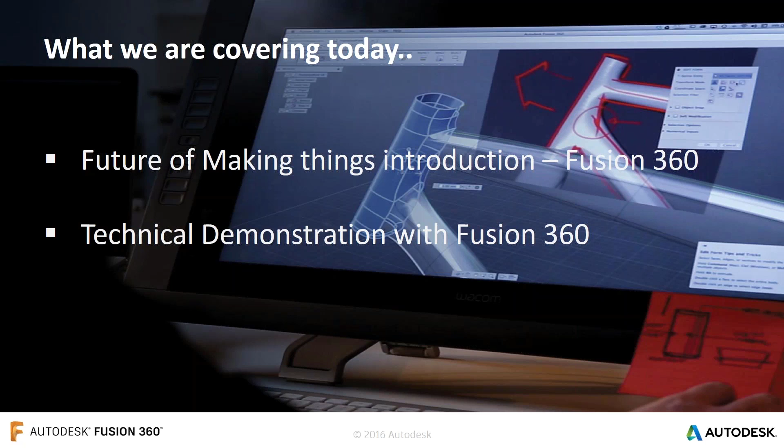So just a quick overview of what we term the future of making things. Now, we've visited a lot of our customers, and a lot of them work in a very similar way to each other. They start off product development with a concept phase. These can be, pardon the expression, fag packet sketches. They could be very quick concepts, maybe some rudimentary 3D models. They then move this into a more production level design, adding all the dimensional constraints to the product itself, creating all the drawings, PDFs, bills of materials.

And then move this into production. This could be a mixture of what we term subtractive manufacture, so CNC manufacturing of components, or even assemblies and bits and pieces. We then move this into selling that product, and finally operating and retiring that product. Now, we can quickly see that it's a very linear process. It's very structured in nature and very siloed. We term this a traditional product lifecycle. And it has what we term a fixed product value, because around the selling, operation, and retire phase, we're having to rethink the concept, design, production phase for the next generation of product.

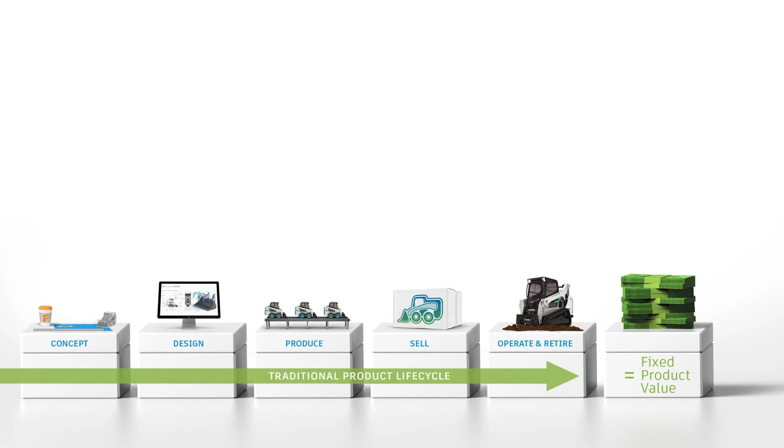Now here at Autodesk, we look at this a little bit differently. During that concept phase, we have a broader reach. We can customize the product a little easier to what that customer would like, whether that's color changes or small changes to suit that customer. We can then use virtual teams. They don't have to be in the same geographic location. They could be dispersed around the globe, but we can quickly start to collaborate with them, bringing in ideas from manufacturing, production and sales to develop the next generation of product.

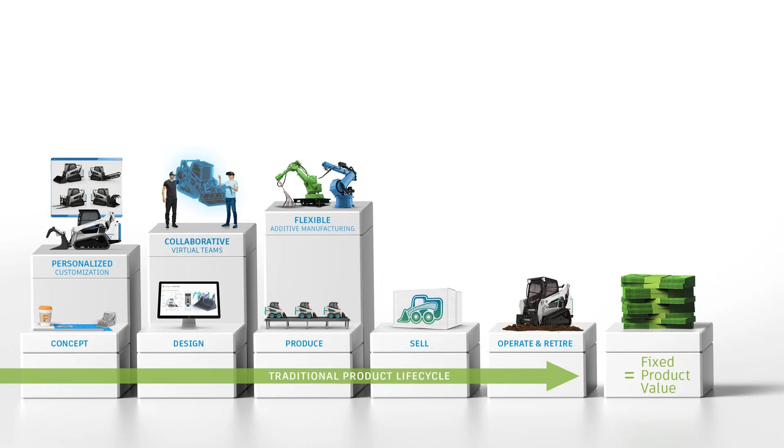We can handle flexible manufacture, so not tying ourselves down to subtractive manufacture, but also taking into account all the 3D printing enhancements that have been happening recently, such as the ability to metal or additive 3D print something and run some final machining toolpaths on it. Moving into the sales phase, the customer's more engaged and the product's more personalized because we've customized it at the start. And finally, we can connect that product to IoT and Industry 4.0, look at how it's being used in the field, inform the next generation of product, or even start to look at preventative maintenance.

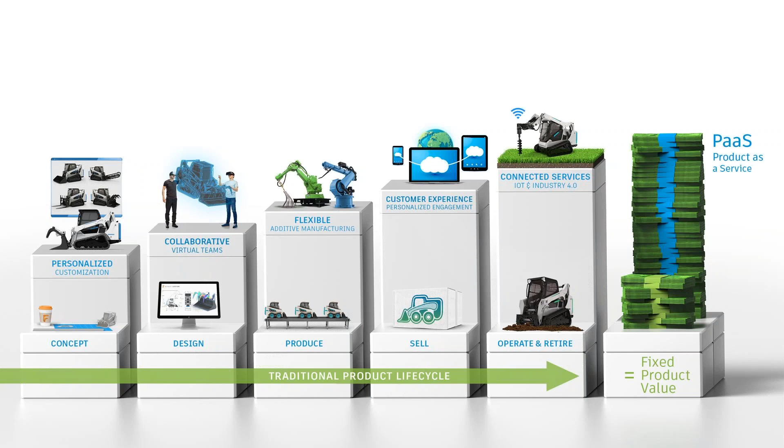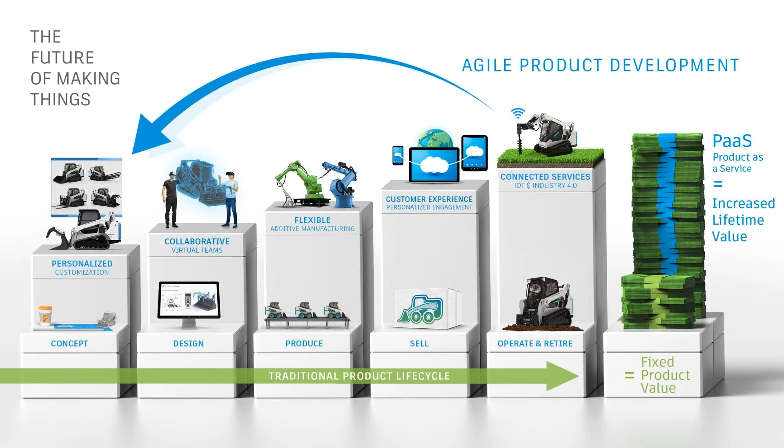So this gives us what we term product as a service. We're not just selling our products anymore, we're also selling the services that go with it, such as preventative maintenance and data capture. And it gives us what we term an increased lifetime value, because all of the data that we capture from that product in the field, we can plug back into our design at an earlier stage in the process, giving us the future of making things. Now all of this sits on what we term the product innovation platform. We can start to work with those design silos.

So starting to look at concept design, we can then go ahead and move this into production, start to look at PCB design, how we can then push that into mechanical CAD instead of leaving that within ECAD. Having the ability to virtually test something, moving this into the make space and actually create that product. And then finally, the use phase and connecting that product up to IoT and Industry 4.0 to quickly and easily go ahead and start to inform that design decision a little bit sooner.

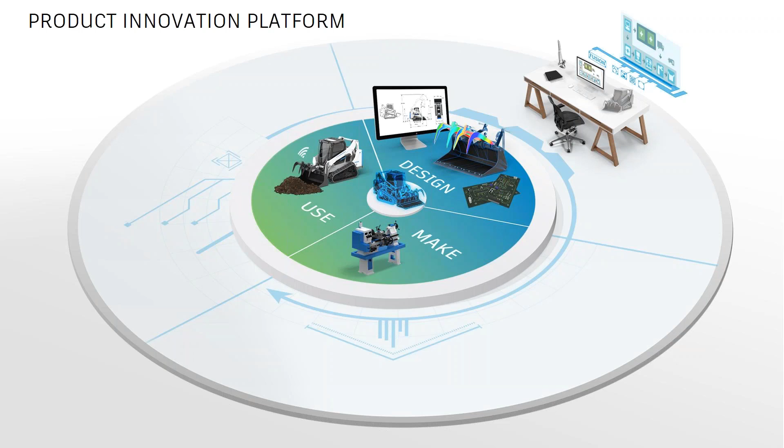From here, what we can then go ahead and do is start to build on that. So bringing in those collaborative teams during the design process to quickly and easily get a broader reach, so we can go ahead and have a detailed manufacturing process further down. We can again bridge that gap, like I said earlier on, with additive and subtractive, having the ability to quickly and easily use that bridge between 3D printing as well as our standard techniques such as subtractive manufacture.

And looking at IoT, not just analyzing the product while it's out in field, but also analyzing how the product's being manufactured while it's still with us, and starting to look at machine utilization and how we can then go ahead and make sure that we're getting the kind of throughput that we need from our production floor. So giving us a really detailed platform of products that we can go ahead and start to look at generating this next generation of product.

And this is what we term an integrated product development platform. So a single platform to take our design from concept through to production. What I like to term art to part. And you'll hear me use that often within the webinar itself. So we start off with form, so we can quickly and easily start to generate those concept models, move this into function, start to create those production level designs that we need, 2D drawings, check for fit, form and function. Move this into fabrication, so obviously manufacturing the product, and finally managing that and making sure that all the versions and bits and pieces are captured as we go.

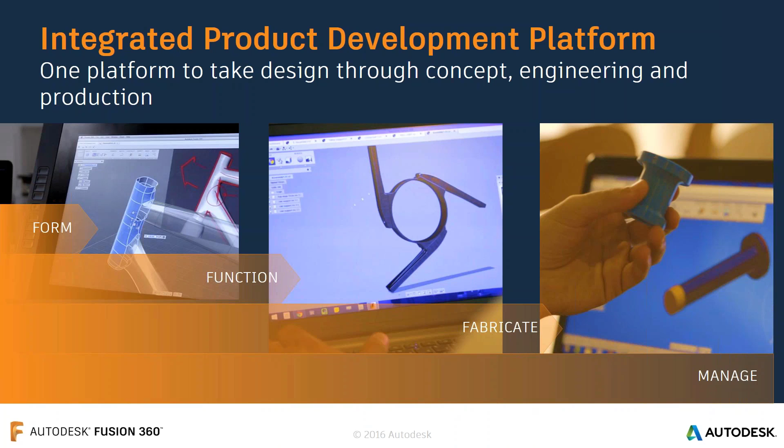Now, just a bit of background on why we built Fusion. We went out to our customer base in the actual market and said, okay, what do engineers and designers want from that next generation or next level of CAD tool that they're going to be using? One of the key things that we found was that they wanted access anywhere. Now, traditional CAD ties you down to a specific set of hardware, and you're tied to that machine, maybe in your office or even a laptop.

Now, instead of that, Fusion 360 works on Mac as well. So you don't actually have a device or a set of hardware specs that you really need to tie yourself down to. So from here, we can run Fusion 360 on a Mac as well as a mobile device, and we have the ability to work anywhere and at any time. Fusion is what we term hybrid cloud, so we can quickly and easily go ahead and access our data wherever we are within the world, and we don't actually need our laptop with us to do that. We can quickly and easily start to view how that data is moving on within our design teams.

They also wanted us to have a bit more of a connection with different teams. Now, generally what we saw is our design teams are kind of siloed, and then when we move it into manufacture, some design changes need to happen, and it's generally either a set of notes, a piece of paper, or someone tapping on a designer's shoulder to say, look, these changes need to happen because of manufacture.

So that's the reason, two of the key reasons why we built Fusion 360. It gives us an integrated platform, which we'll be showing you in a second. It gives us the ability to connect a whole host of virtual teams within Fusion or within the business, and also gives us accessibility anywhere we are in the world. So it gives us that complete 3D CAD that we need, when we need it, on demand.

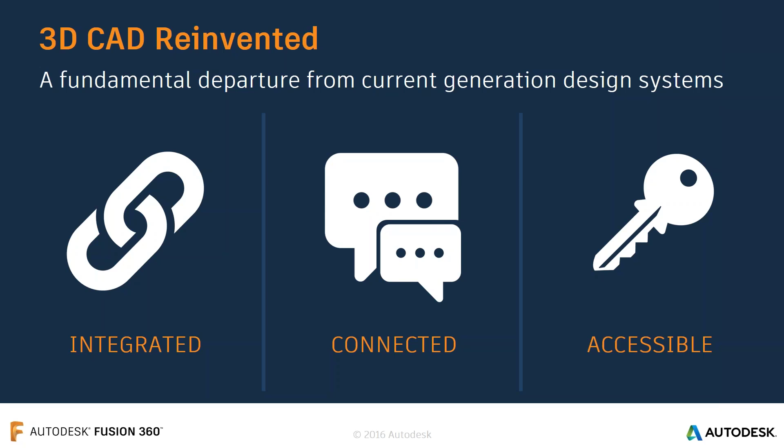So let's jump into the technical demonstration of Fusion. Now we're going to concentrate this technical demonstration on the new functionality, which is sheet metal, which was released on August 8th this year. And we're going to go ahead and focus in on some key areas.

Now we're going to look at this router table, and specifically we're going to look at the actual router head, and we're going to create the sheet metal components for this segment itself. So these areas just here, the cap at the top, this front sheet metal component, and this one at the bottom as well. We're going to look at how we can use this within Fusion itself.

So we're going to initially look at the sheet metal functionality, how we develop a sheet metal component within Fusion, some of the sheet metal tools within Fusion. We'll look at some of the rules, how we can override those, creating flanges and bits and pieces. We'll then move this into what I mentioned before, which is our communication layer, how we can communicate this design out to other people within the organization.

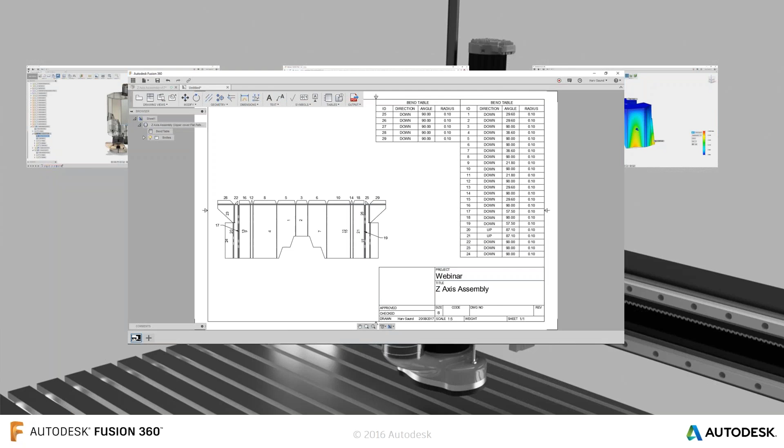We'll then look at how we can take that design and use some of the simulation tools within Fusion to quickly and easily test the design and make sure it is fit for purpose before we manufacture. We'll go ahead and start to look at the flat pattern and the actual drawing, and creating the bend table within Fusion as well, so again a real quick and easy way of doing that.

We'll move this into the render space. Again, we want to create a nice visual for our customer, and we'll go ahead and do that. And then finally, we're going to finish up with the CAM, so we're going to look at how we can manufacture that product. In effect, what we're going to do is take a design from art to part, so it gives us that complete area that we can then loop through.

And again, I'll be going back and forth and switching between Fusion just here.

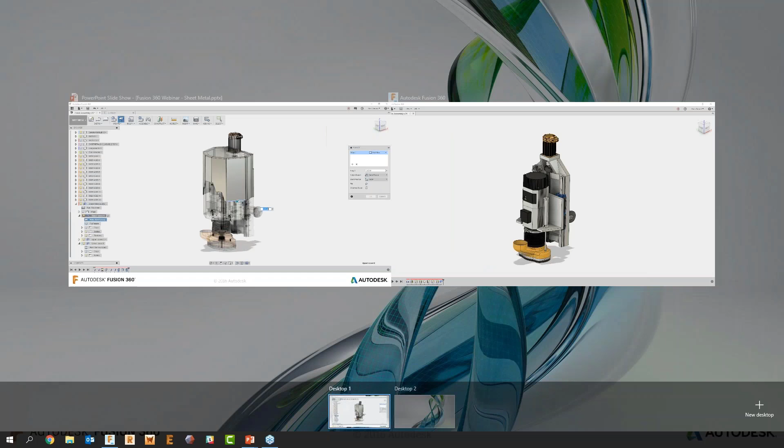So let's jump into Fusion and let's go ahead and take a look. So here's my example, or here's the router head that we're going to use, and we're going to create all the enclosures and bits and pieces for this design. Now, at the moment I'm in my modeling workspace, as you can see in the top left-hand corner of the screen. And if we want to jump into sheet metal, it's simply a workspace switch.

So we can quickly jump into the sheet metal environment, and we now have sheet metal specific tools. We start off with our sketches on the left. We then have the option to create new components and flanges. We have the ability to look at sheet metal rules. And if I expand each of these, you'll see specific sheet metal tools as well, such as unfold, and also the option to create a flat pattern as well.

So I'm going to go ahead and start off. I've already created a quick sub-assembly for our sheet metal covers just here.

Now, there's a reason why I've done this, and I'll show you later on as to why we've gone ahead and done this approach itself. But first thing I'm going to go ahead and do is create a sheet metal component.

You don't have to do this, you can just start off with a sketch. But I like to organize my browser on the left-hand side of the screen, so that's one of the reasons why I'm going to go ahead and do this. So I'm going to call this upper cover.

And at this stage, I can start to specify the sheet metal rules that I want to use. Now, we have a standard library of rules that we can go ahead and work with, or we can have a couple of customized rules as well. Each of these will start to look at specifying your thicknesses, K factors, bend allowances, conditions for the bend, relief statuses and bits and pieces. So I can set these just here, for this design.

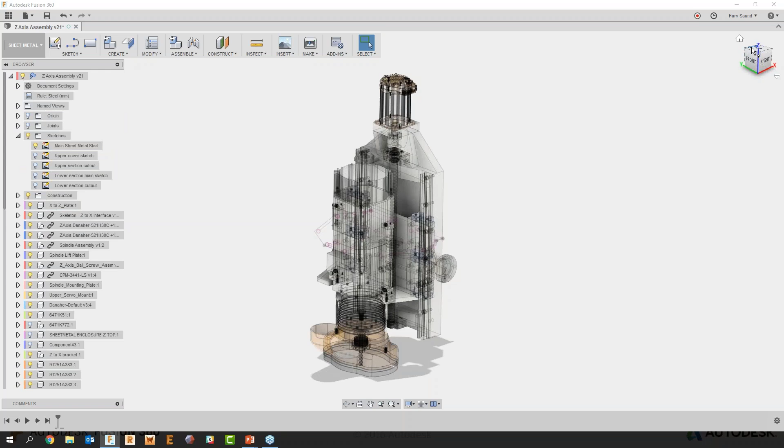So for this design, I'm going to go ahead and start off with a sketch. I've already created a few sketches that I'm going to use, and I'm going to snap to a top view so you can see the sketch that I've created. This is the sketch I've created just here, and it's just a couple of offsets from a couple of edges from the design so that we can capture the absolute outside limits of that design. Using this sketch, we're going to quickly create that first sheet metal component.

And we have a single flange tool to do that. Our flange tool will go ahead and start to look at creating base flanges, contour flanges, open flanges, edge flanges, so on and so forth.

So if I pick up on our flange tool and specify a contour or a sketch edge, you'll notice that it's open, so you don't actually need to have a closed contour to create the first flange itself. You can quickly and easily, very visually, start to grab and drag and create the flange that you want to use.

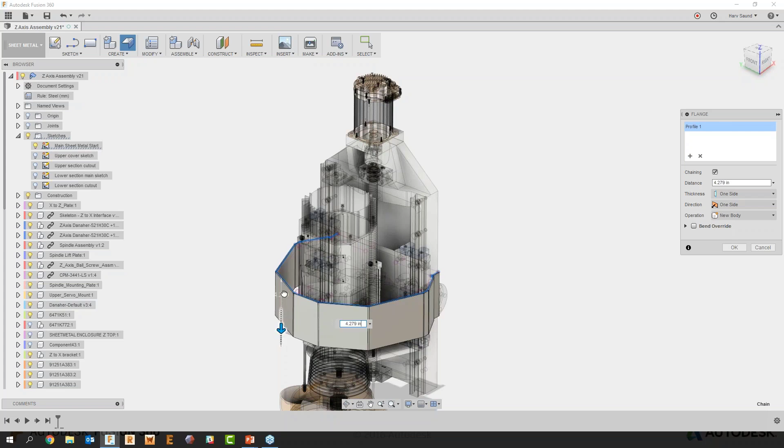Now I want to snap to a specific height because this flange is going to finish at this face just here. As soon as I hover over it, it will give me a size that I'm going to snap to. So I'll snap to that, and I can also set a value for this. I'm going to call this -12.5. From there, I've hit enter, and we can start to see that flange being created.

I can come back here, edit the feature, and we can start to specify some extra options. You can also do this when you go ahead and create the flange. I was just a little bit too quick with my enter key, so I pressed enter the first time round. So let's go ahead and start to set a couple of options for this.

Now at the moment, the sketch itself is sitting on the inside, and our flange is sitting on the outside. Now I actually want the flange to sit on the inside of that sketch. So over on the right hand side of the screen, I can specify my thickness direction - whether this is on one side, whether this flips to the other side, or whether this is symmetric, so the sketch sits in the center of the actual flange itself. That's totally up to you how you want to do that. I'm going to go for the other side so it sits flush with the actual component itself.

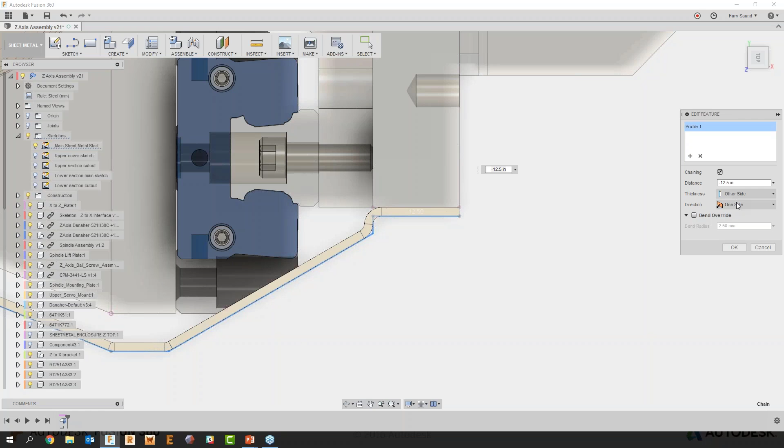And then at this stage in our dialog box, we have the option to go ahead and override the bend radiuses as well. And again, we have the option for extrusions and bits and pieces. So it gives us the ability to very quickly and easily specify that first flange that's being created within Fusion.

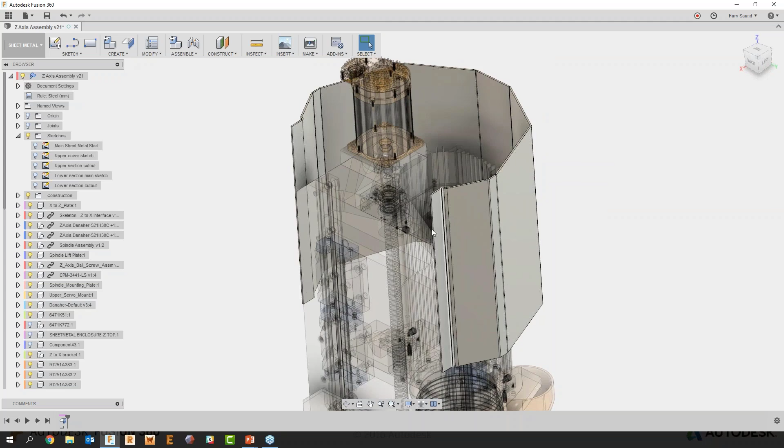So we've already started to create that sheet metal component. Now, one of the key things I want to do is take this component and make it a little bit more complex than it actually is. From here, I want to grab a flange on this edge and bring it in. As you can see, we've got a slope on this side at the back just here, so I want to match that slope and create a flange just in this top section. So I'm going to go back into that flange tool.

If I right click, I have my flange tool on my gestures menu. From there, I can pick up a couple of edges just here and here, and with that, I can just grab the arrow and drag. Now I like to do things visually, and as you can see with Fusion, you can do it very visually.

So very quickly and easily, you can start to create those flanges. Now they're going the wrong way, I want to flip them. I have two options: on the right hand side of the screen, I have the flip option, so I can flip that the other way, or I have the rotation ring that I can use. This is very useful, and I use this more than the flip option, because I can actually visually see if I want an angle on that design. Very quickly and easily, it gives us a very easy and visual way of utilizing that. A great tool just there for Fusion.

Now again, I can start to specify the overall distances that I want. I want this flange to be 4 inches, and from here I can start to specify our bend positions, whether it's inside or outside. We can also specify a height datum, so where we're measuring that flange from. At the moment it's set from outer faces, so it's going to measure it from this face to the edge. If I wanted it inner faces, it will measure from the inside edge to the outside edge itself. So it gives us the ability to quickly and easily limit and change those as we need to.

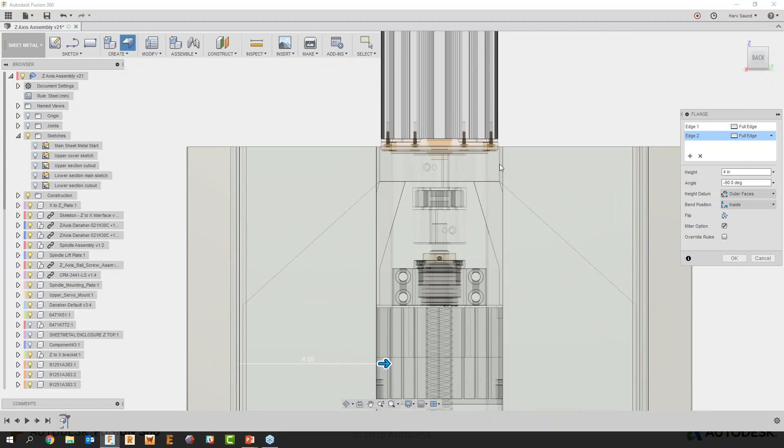So if I snap to a back view just here, as you can see, the flange finishes just short of that top pillar just there, but it is actually a full length flange. Now in traditional CAD, to change that flange, we'd start to look at maybe adjusting sketches, or even coming back in here and creating smaller cutouts, and maybe actually the flat pattern may start to fail. We'd have to create potential relief cuts in certain areas.

With Fusion, we've kind of changed the game with this. On the right hand side of the screen within our dialog box, every flange is considered its own, so we can adjust the overall parameters for the flange, the size of the flange individually from each other. For edge 2, which is the one I've got selected just there, I can go ahead and say that's either going to be a full edge, or I can make that symmetric. If I grab one of those arrows just there, you'll notice I can extend past the extent of the flange, and the relief options appear as they should, or I can come back in, and again those relief options appear as they should.

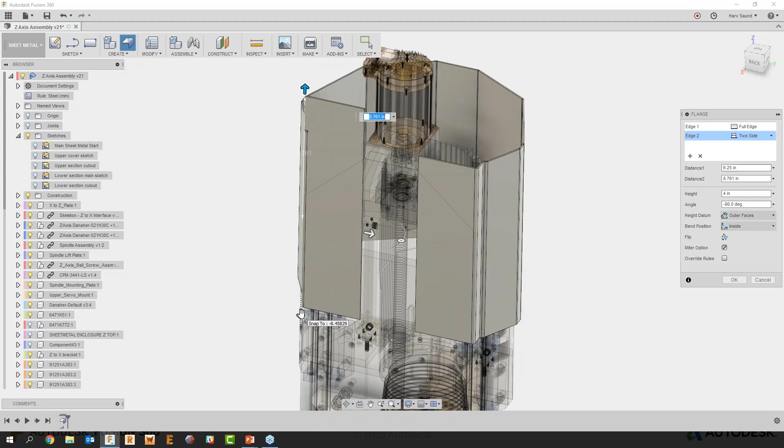So very quickly we can have that symmetric flange either side from the center. If I wanted that to be maybe two-sided, so an offset, one side's longer than the other, or even if we wanted an offset where one side overlaps the edge of the flange and the other side is centered or inside that, we can do that very simply within Fusion. Again, I'm using the arrows on screen, but you do have dimensional control as well. Or we can go all the way and say that flange is going to be slightly longer. We also have the option for 2 offsets, so you can specify a reference edge or point that you want to use, and you can specify where that flange is going to be within that point.

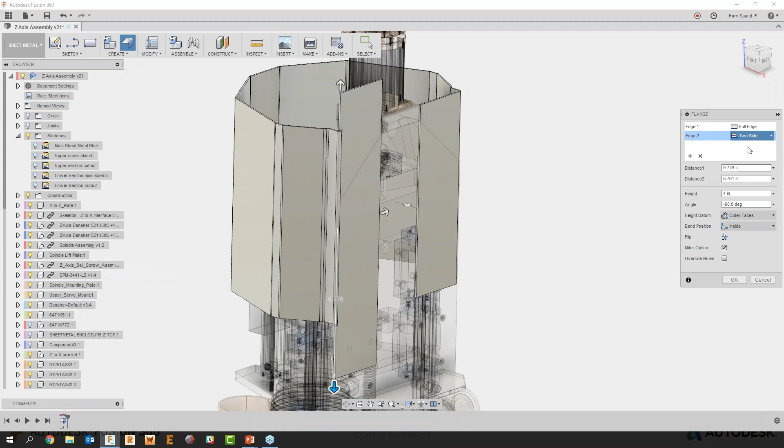So I'm going to go back to a full edge just here, and maybe what I want to do is use two sides. I can actually bring this side down because that's going to be flat to there.

And what I want to do is just bring this side back up again. So for that, I'm going to go ahead and make that -2 inches from the center. And that's then going to go ahead and create me a flange that is slightly off from the edge or the end of that slope, and also put the correct relief cut that I need in. When we go to flat, it will be correct for that.

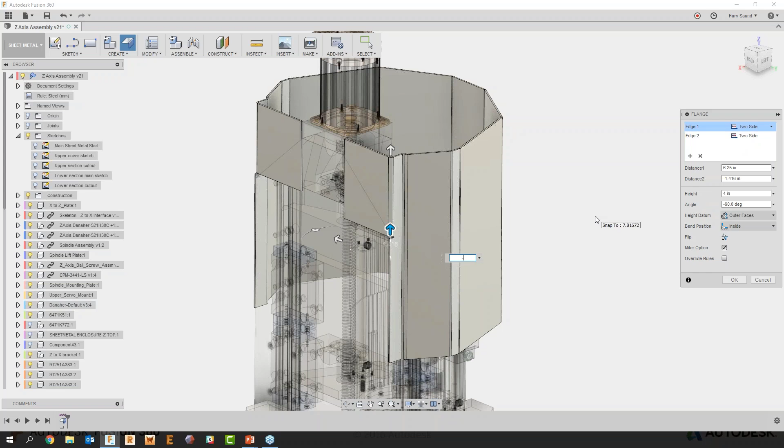Now you'll notice that's actually only occurred on the left hand side of the flange, or the left flange that we've created. We have complete control like I mentioned on the other one, so I can quickly and easily go ahead and specify this flange may be slightly different. So it gives us a very quick and easy way of actually creating two flanges within the design that are different to each other. So again, traditional CAD, it would be very difficult to do, or could be quite tricky with a lot of steps to do.

Now I want to create that slope, so we can come back in here and we can start to use our sketching tools. So I'm just going to pick up on my line tool just here. We'll make sure that we pick up on the correct point that I want to use, which would be that one there. And very simply, we're just going to go ahead and draw out just the relative shape that we want to use to then create that cut. And again, using press pull, I can quickly and easily create that cut that I need from our sheet metal component, and just specifying that I only want to cut the upper cover, which is the component that we've done, and it's created that flange for us in the correct form.

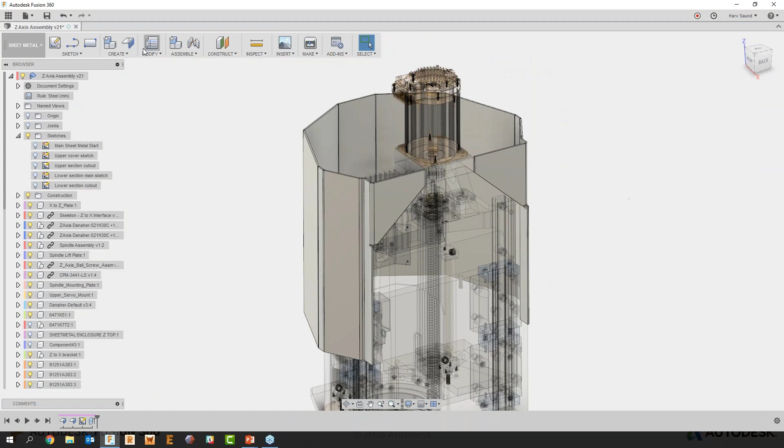Now, one of the cool tools within Fusion that gives me the ability to start to look at individual areas of the sheet metal component, or individual bends, is the ability to go ahead and use our tool called Unfold. This will allow me to quickly and easily pick a stationary entity, which would be that one just there, let's say, and we can then go ahead and unfold individual bends from that. If I pick this as a stationary entity and pick that one, it will then go ahead and start to unfold each of those bends itself.

And we can unfold multiple bends if we wanted to, and we can start to see how that design starts to develop within the flat. A very nice tool to quickly and easily start to analyze how that sheet metal component is going to be built if we need it.

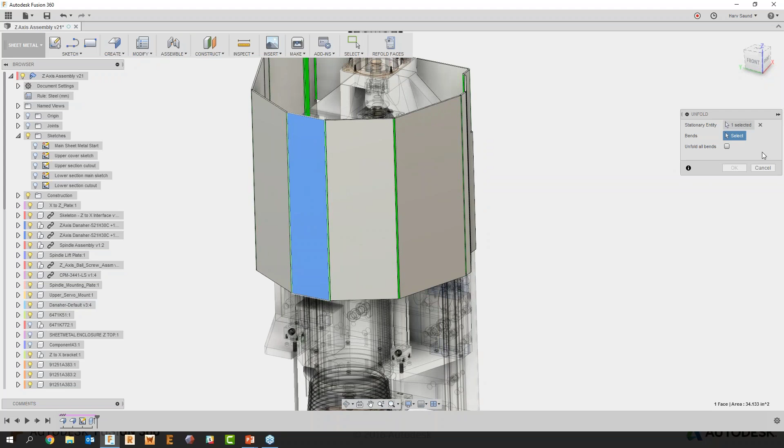Now, using that unfold tool, I want to create a quick cutout on the front, because the cutout on the front is going to be done within the flat. So it gives us the ability, using this unfold tool, to specify a stationary entity, unfold all the bends, and very quickly and easily we have all of that component completely flat. And from here we can quickly and easily start to create a cutout that's going to be a detail feature on our design.

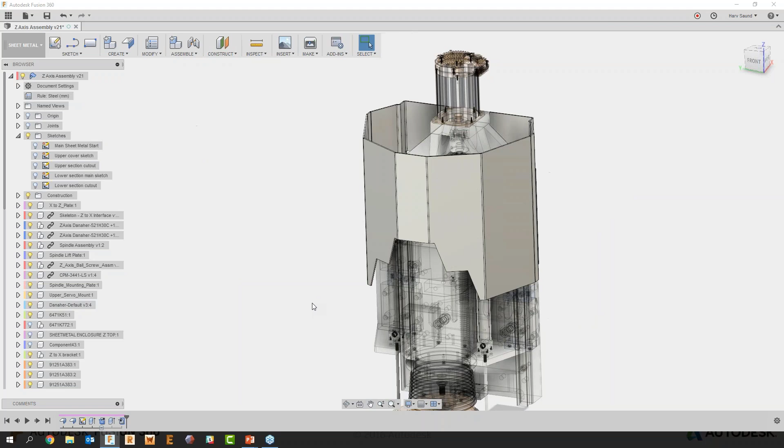And again, I just want to make sure that I am cutting just the upper cover, and it gives us that just there. Now when we refold, which is this tool at the top just here, this is then going to give us all the correct fold parameters when we go ahead and look at the development of the flat. So instead of creating a cutout within the 3D, we can do it within the 2D, which is where this would occur, and then we can see what the development will be. So a great tool just there with fold and unfold.

Now we want to go ahead and create a few more flanges, just one on the back just here, and then a couple along the top. So again, let's pop back into our flange tool. We'll pick up on those two edges just here and here. And again, we have the ability to very quickly create just those flanges that we need. So this one, I'm going to make about an inch wide. Actually, just make that 1.5 inches, because it makes it look a little bit better.

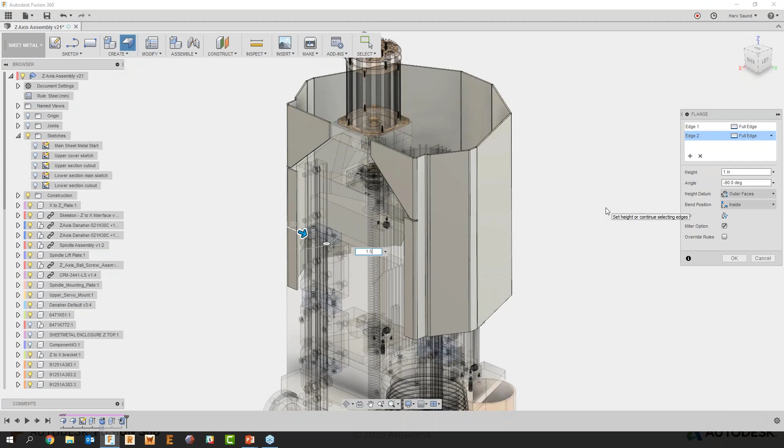And if I just again snap to a top view, we're going to quickly start to see where these flanges are. Now these flanges actually match up with this edge, but we've actually got a block in place. So what I'm going to do is maybe move those outside to that bend.

So what that will then allow us to do is actually match that face up to this inside face itself. So when we come out of the component and activate a higher component, you start to see that. So very quickly we've created that one.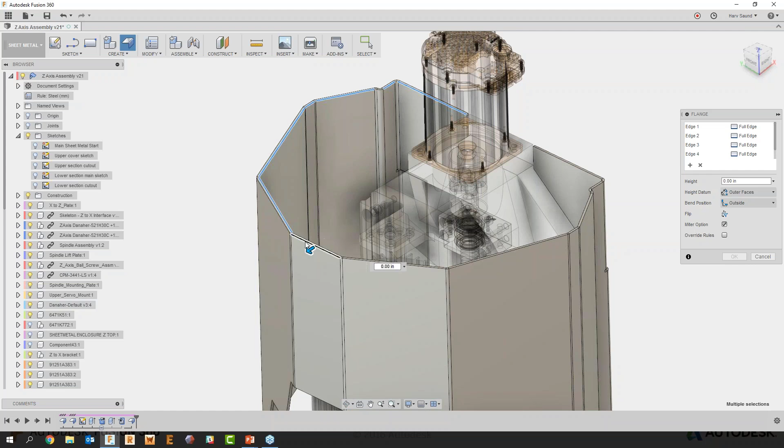Now we also want to create some tabs along the top. So again, I'm just going to pick up on a few of these edges. Let's just pick those again, because I've done those in a different way. Let's go for the inside edge instead. You can just reselect from the dialog box if you wanted to. I'm just lazy, and I'm going to reselect the ones that I want. So let's go for these just here, and we'll pick up on all these internal edges.

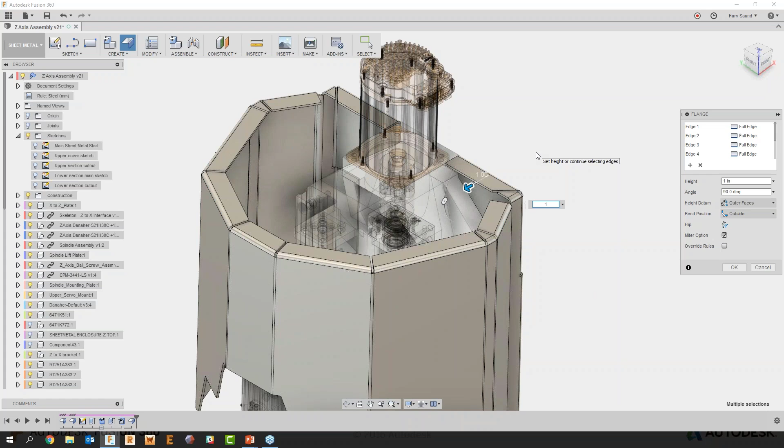There we go. So again, one of the cool things with this flange tool that we've got within Fusion, I've picked all of those edges. Now in traditional CAD, it would be quite tricky to create all those miters within the design. Fusion does that automatically for us. So if I make those flanges, let's say an inch wide, it will do all of the miters for us, as you can see just here.

And what we can then start to specify is where that flange would sit. Now we're going to have a top cover, and as you can see, that's my back panel just there. So I can quickly and easily flick these to inside, and then that's the top section where my cover is going to sit. So very simply, very visually, we can create sheet metal components within Fusion itself. And that's that first component done.

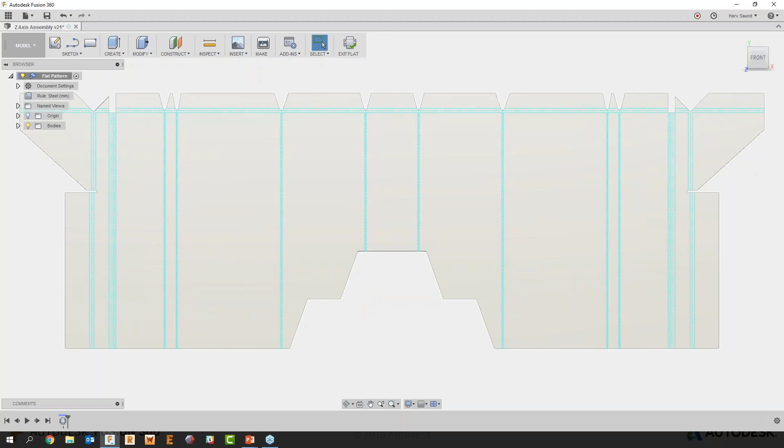Now, what I want to do is maybe create a flat pattern at this stage, just to check that design. So I can pick a stationary face, and very quickly the flat pattern is created. Within that flat pattern, we can see all the bend lines and bits and pieces within that design. I'm going to be using this flat pattern in two forms a little bit later on. We're going to look at this in the drawing environment and bend tables, and we'll also look at this in CAM. But I'm going to leave this as it is for now.

So if I exit the flat, we're back just here. And if I want to activate that flat at any time, I can find that flat within the browser, and we have the option to activate, and it will take us back to that flat pattern. Now, we're going to develop this design further because we want the top cover and also the one below it. So let's create a couple more components.

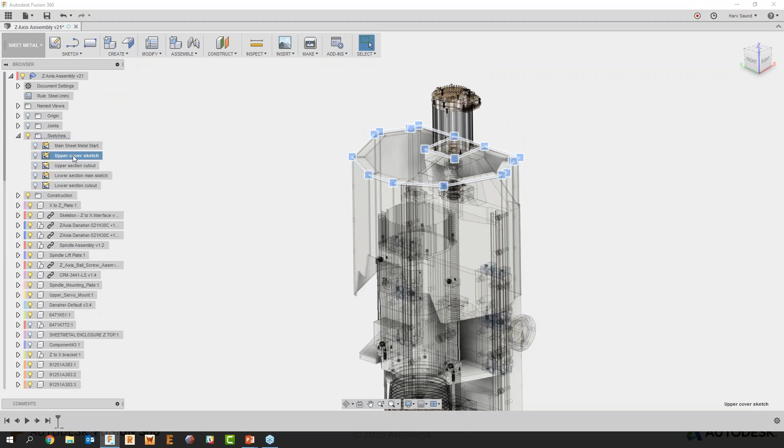So from here, I want to specify our sheet metal covers as our top level, and I want this to be top cover. And we'll keep those same rules. Again, I've got a sketch that I want to use. This one is a closed contour. We can use closed contour sketches to quickly and easily create the overall design itself. So I want that one just there. There we go, our profile selected. And very simply, we can create that sheet metal component, and it will add the thickness where we need it to be. That's a very simple sheet metal component, but it is still a sheet metal component that we're going to work with.

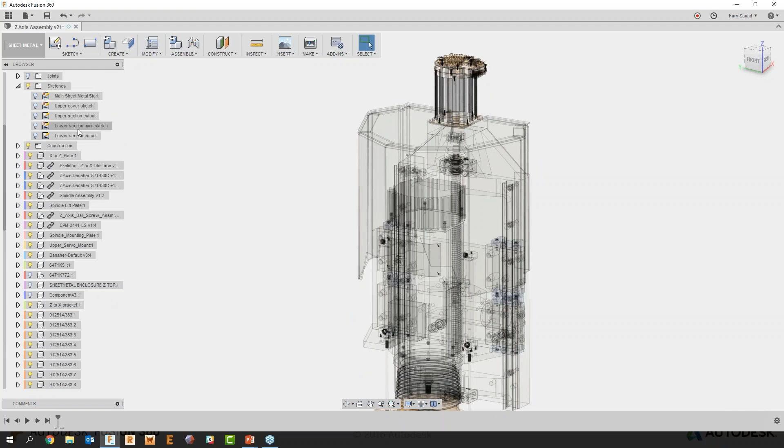And then finally, I want to create the lower section as well. So again, I'm going to create another component, and call this lower cover. And again, specifying some sheet metal rules. If they're going to be different for this component, we can have them different. I've got some sketches that I want to use, a lower sketch just here that we're going to work with. Just using that flange tool, we can quickly pick up on that sketch, and we can drag that up. This one is actually going to be 11 inches tall.

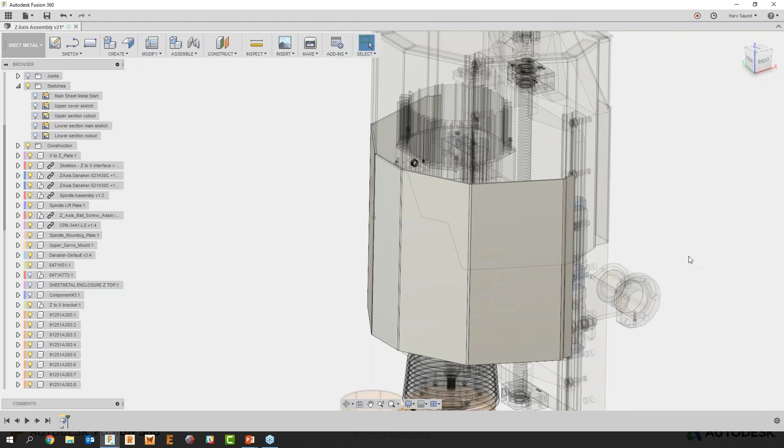So again, it covers the actual design itself. And this router is currently at its lower position. Now again, what I can see is I've hit the OK. Again, I'm very quick with my mouse, but the actual covers overlap. So I can always come back into my timeline at the bottom, edit that feature, and we can start to specify where thicknesses and bits and pieces occur. So that works exactly like any other feature within Fusion itself.

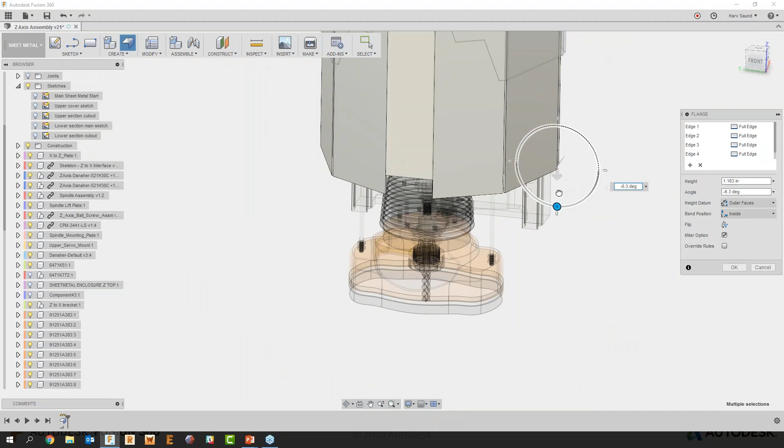Now from here, we want to develop this design a little bit further as well. So what we're going to do is add a few flanges to our design. So again, I'm just picking up on a couple of edges that I want to use. I want that one, small one just there, and maybe this small one just here. And again, I can move those out, but I also want to put a bit of a tilt on these instead. So I want these to be at a specific angle, so they just taper in slightly.

And again, at any time, we can start to override any of the rules for those flanges. So if there's specific relief options you want for this flange, you can specify those. You can start to specify your bend overrides, so what your bend radiuses are going to be, your 2 bend corner overrides, and your 3 bends as well.

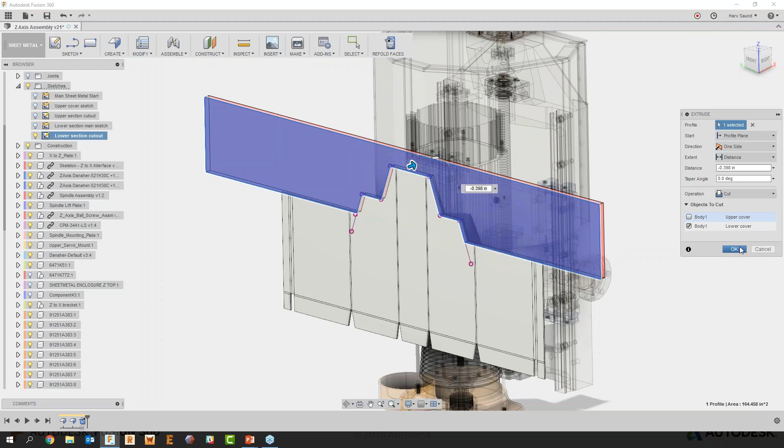So once that flange is created, great, our design's done, but we also need a slight little detail on this design as well. So again, coming back into that unfold command, we'll quickly and easily unfold that design. And again, just using a predefined sketch that I've created, we'll quickly and easily create a cutout for this design as well. And again, I only want to cut the lower cover, and very quickly and easily that's done as well.

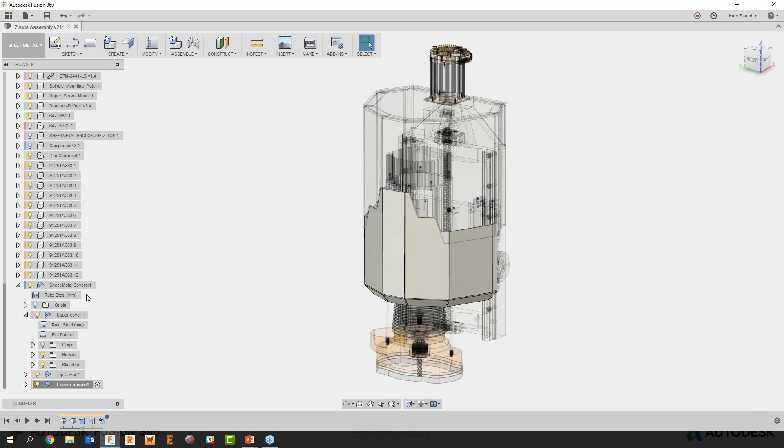We'll refold, and then when we create the flat for this design, specifying that stationary face, you can start to see that that flat's created as well. So very quickly and easily, we can start to develop different levels of sheet metal component within Fusion itself. And if I just activate our top level design itself, so let's go for our sheet metal covers just there. Our sheet metal cover designs are done.

So very simply, using that single flange tool, we've been able to create a whole host of different flanges within Fusion, also create a whole host of different flat patterns within Fusion, and have the ability to quickly and easily develop a whole host of different designs directly within Fusion. So our Z-axis covers are actually done very simply within Fusion itself. So it gives us the ability with sheet metal within Fusion, a quick workspace switch. We can pick up on open or even closed contours to quickly and easily drag those contours, creating the kind of flanges that we need.

We start to specify the type of edge conditions for those flanges, having the ability to quickly and easily specify different edge conditions. So whether the flange extends past the actual edge of the flange that you're creating, or even having them symmetric, we can angle those flanges very visually within Fusion, and we can quickly and easily specify any bend positions, datums for heights, and also all the rules that we need to then manufacture the design itself.

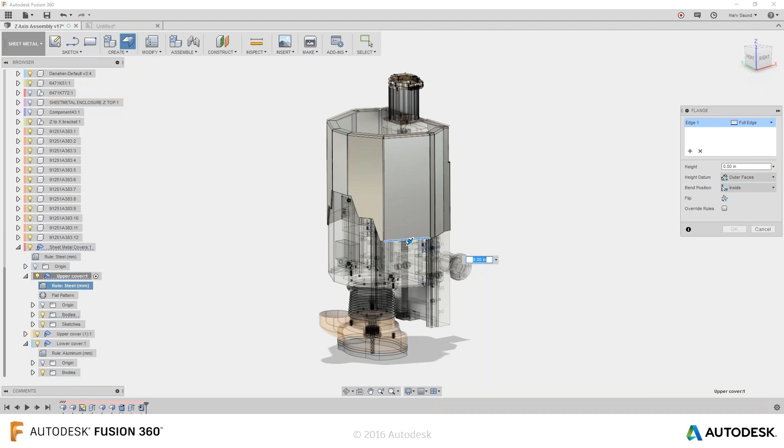So moving on a little, we may want to start to look at communicating that design with someone. So we may want to look at how we can open this up to the broader team and how we can communicate the manufacturing methods or even the flat patterns directly to someone else within the business itself. So let's jump back into Fusion. Let's go ahead and take a look.

Now within Fusion itself, down at the bottom left hand side of the screen, we have a comments tab. So from here we can start to look at creating in-CAD collaboration with whoever we need. So from here I can specify just a very basic comment, or we can specify comments on a specific object, or even comment on a specific point. So if I comment on a specific point just here, we can say sheet metal cover's done.

What do you think? And if we post that, this is then going to post a comment for us, having the ability to quickly and easily pull in different teams and collaborate with different people within the business itself. So this is just uploading at the moment, and it's going to take a snapshot of the image that we've created. It will upload it, and then from there we're going to look at how we can view that comment and how we can engage other people within the design process. So we have that comment that's uploaded.

So let's open this design up within a web browser. Now, one of the key things for us with Fusion itself is that we don't actually have an install for viewing designs. So you don't actually have to install anything to view it. It's all there ready for you within a web browser or even a mobile app. So if I pop back a level just here, I can see all of the options for all the parts that we've got. We can see who the owner for those parts is. We can see who's actually using that component itself.

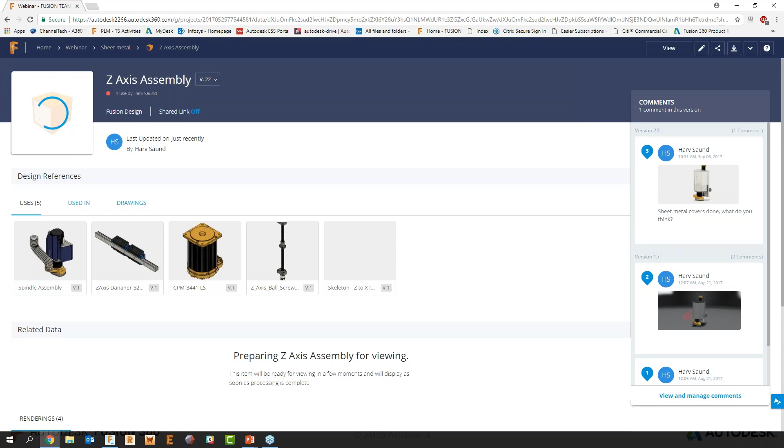So I can see the comment on the right hand side of the screen. It's just preparing that for viewing at the moment. My internet is looking to be a little bit slow today.

There we go. So we have the option for sharing. Again, I have that little link just there that I can copy. We can add a password to this design if I needed to, or I can send emails or even embed this within a web browser. But if I hit the view tab, this is going to start opening up our view tool. One of the key things with Fusion is that we have all of our versions along the top. So I've actually developed this design to 22 versions. Every version within Fusion is captured. So if you ever need to go back, we have the ability to do that.

So from here, what I can see is the sheet metal cover's done within the actual web browser itself. I can see any comments that are captured. So we can see that directly on screen just there. We can also show that in a feed that you can see just here. And we can see what comments are captured at what version. So it gives us the ability to quickly and easily capture an audit trail.

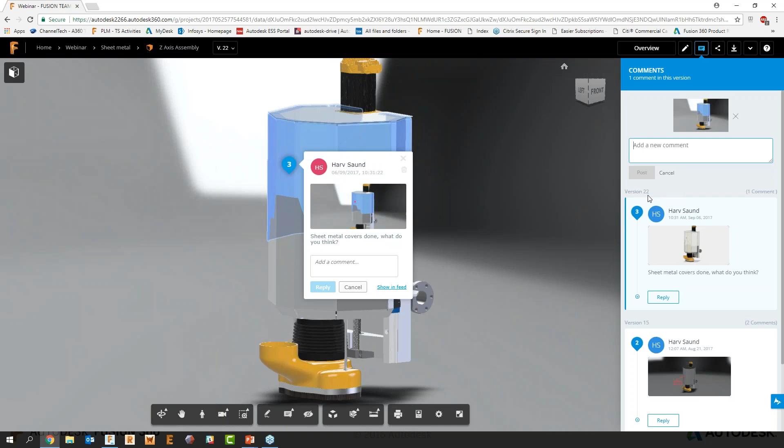Now, if I want to comment back on that design, we have the options down at the bottom to do red line markups if I needed to. So if I wanted to pick maybe an arrow, we can put an arrow in. We can put some text in, and we can say, looks good.

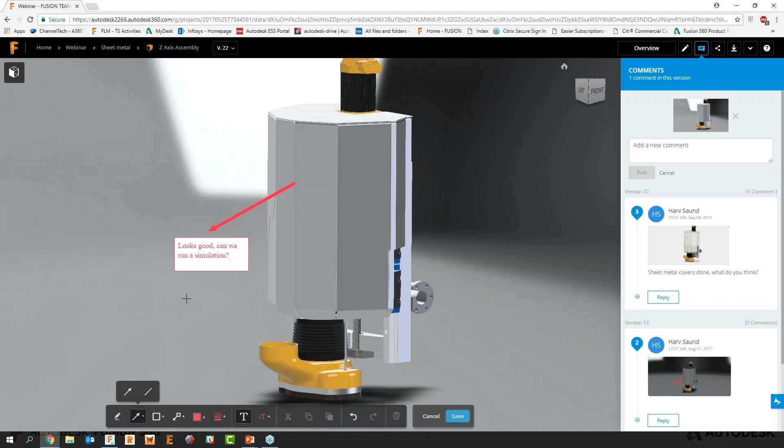Can we run a simulation? It's a very vague comment to have, but we'll go ahead and save that. And that will then go ahead and create us a red line markup for this design. So again, sharing this design with anyone that we need, whether that's manufacturing, whether that's outside vendors, whether that's a sheet metal fabricator, all bits and pieces, we can quickly and easily do that via a web browser.

No need to install anything. So I've created that comment, and as you can see, it's posted on the right hand side of the screen. But if we pop back into Fusion and I come back into this comments tab, it's automatically updated within my Fusion browser as well. So from here, I can quickly and easily start to see that snapshot once that's loaded of that design, and then we can quickly start to see how that design needs to develop using our communication tools within Fusion 360.

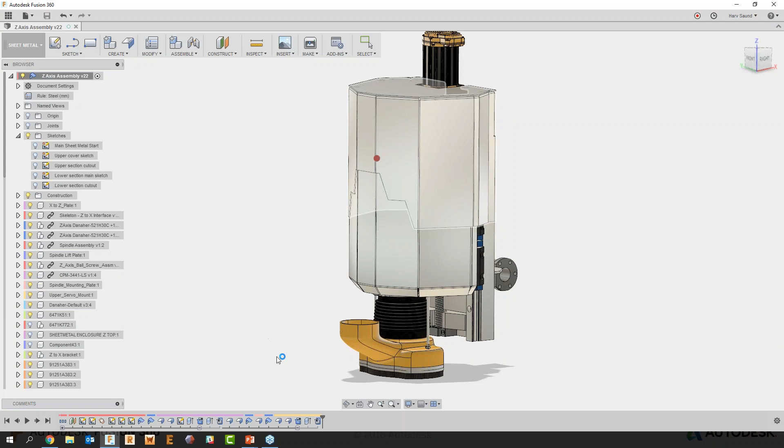So again, opening up sheet metal design not just to your design department or your manufacturing department, but very simply going ahead and expanding this to the fabricators that you're going to use to create the component, your manufacturing teams off-site, so it gives you a very simple way of quickly and easily collaborating.

Like I mentioned, this is web browser based, and we're not tying you down to Chrome like I'm using here. You could use Edge, Safari, whatever web browser that you're working on, and it also is available on a mobile application. So again, you can quickly and easily start to zero in on a mobile app, just in case you're on holiday and you just want to quickly check to make sure that your design team is doing what they should be. You can quickly and easily go ahead and do that and make any comments that you need.

Now, moving this design along, they wanted to go ahead and run a simulation. So let's quickly look at how we can take that sheet metal design that we've done and pop this into the simulation environment, giving us the ability to use that sheet metal design that we've created directly within the platform itself. So let's pop back into Fusion.

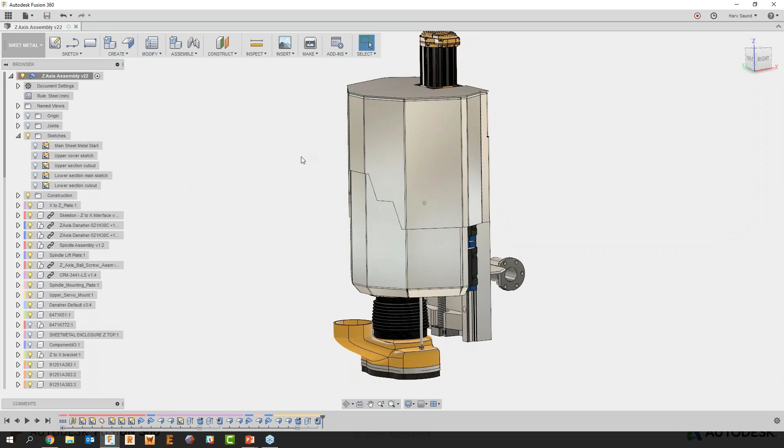Now I want to go ahead, like I said, and test this design. So I may want to put a 200 Newton load on this face just here, hold it at the top, and start to see what's going to happen. So just like anything within Fusion, it's just a workspace switch. We're not activating any add-ons or bits and pieces like that. We can quickly and easily jump into our simulation tools, and from here we can activate a whole host of very high-end simulation tools within Fusion.

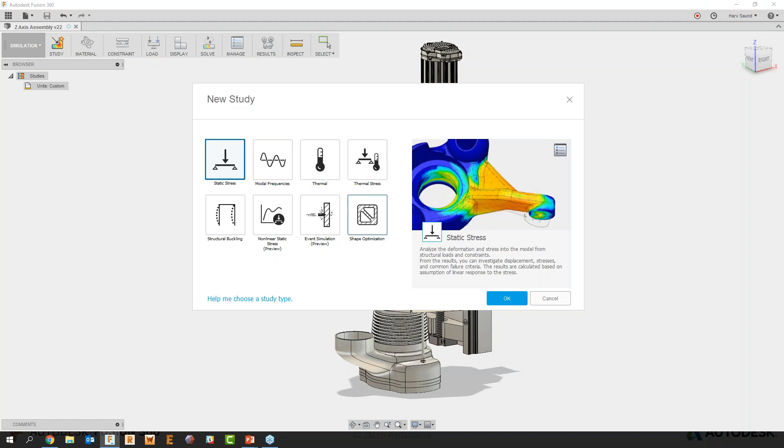We have the ability at this stage to do your standard static stresses on assemblies. We have the option to look at frequencies. Now we mentioned PCBs earlier, so we can start to look at thermal analysis as well, looking at how heat dissipates. But we also have the ability to do stuff like generative design at this stage as well, such as shape optimization. So we're going to focus in on static stress just here. And if I click OK, this is going to start our static stress study for us.

Now, I don't need to analyze everything. I just want to analyze the upper cover and the lower cover. So I'm just going to double click and select those two just there. And we'll suppress everything else out of the design. I've just used the right click to do that. So here's our design. Now what I want to do is put a load to this, or set the materials initially. So along the top, we start from left and we go right.

So at this stage, we can start to specify the type of material that we want to use. So if this is going to be an aluminium, if this is going to be a steel, you can quickly test the variations between the two and compare them. Now I'm going to leave them as they are.

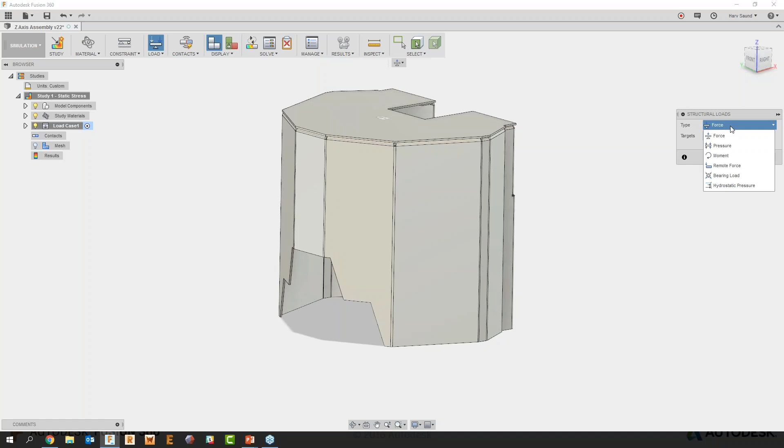We can then go ahead and start to specify some constraints. So I'm going to fix this at the top face because that's where it's potentially going to be bolted in. This bottom section is going to be a little bit more free, so we can start to specify the loading conditions on those. Now the loading conditions can be forces, pressures, they can be moments if you need them to, and I can specify target faces that I want to apply those to.

Maybe I want to go ahead and apply a 200 Newton load, and that's a total 200 Newton load at the moment on both faces, but if you want it on each face, you can go ahead and put a force per entity. If I click OK, we are analyzing an assembly, so we need to go ahead and just create the contacts.

The contacts are the interaction between the two parts itself, so we'll quickly go ahead and do that within Fusion, and that's just going to join these two together. Then finally, we have the option to solve. Before running a solve, we can quickly pre-check to make sure we've got everything in place.

One of the key things with Fusion, I mentioned it earlier, is hybrid cloud. You have the option to run on cloud, so if you don't have the hardware on your machine, you can take all the simulation solving and chuck it straight up to cloud. This will allow you to quickly and easily solve the design on cloud, and it chucks the results back to you. So you don't actually need to run this locally on your machine. If you do have the hardware, you can run this locally.

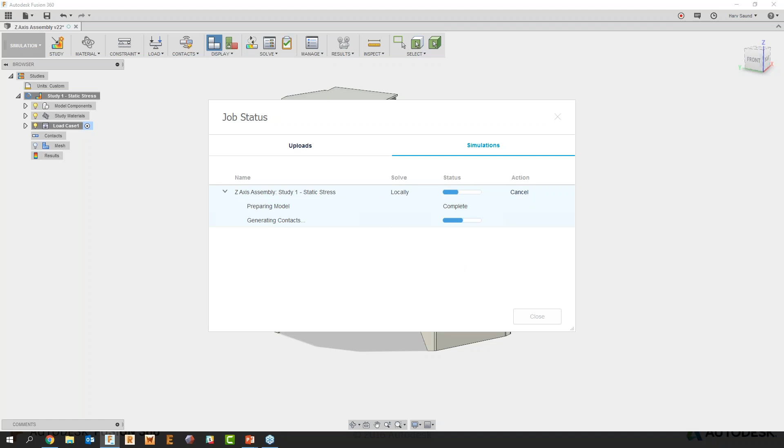I do, so I'm going to just quickly run this locally and hit solve. This is going to go ahead and run a simulation for us. What it's actually going to do is quickly mesh the model, breaking it down into small elements. We are working within what we term finite element analysis. From there, it's going to go ahead and run the simulation.

It's going to give us some deformed plots at the end to see what's going to happen when we fix that top face and punch two 200 Newton loads either side of the actual design, and see if the part's actually going to fail, or if we need to beef it up in specific areas, add certain ribs or gussets and bits and pieces within that design.

It'll take a minute or two to solve, and then from there we'll go ahead and start to analyze the results and see what kind of results we're going to get for this design. We could push this to cloud and then carry on with Fusion, looking at how we can develop other areas of the design. When we come back, Fusion will give us those results, or we can pop back at any time to see those results.

So it's going to solve for us. It's going to take a minute or two. There we go. And then once we're done, we'll go ahead and start to look at those results.

One of the key things we get straight away is the minimum safety factor within the design, and we can start to see if that design is strong enough to suit the minimum safety factor. At the moment, our minimum safety factor is 15, so it's very strong within our design. We can start to look at the strongest areas of the design, and our results detail give us a quick snapshot on what the actual design is going to do.

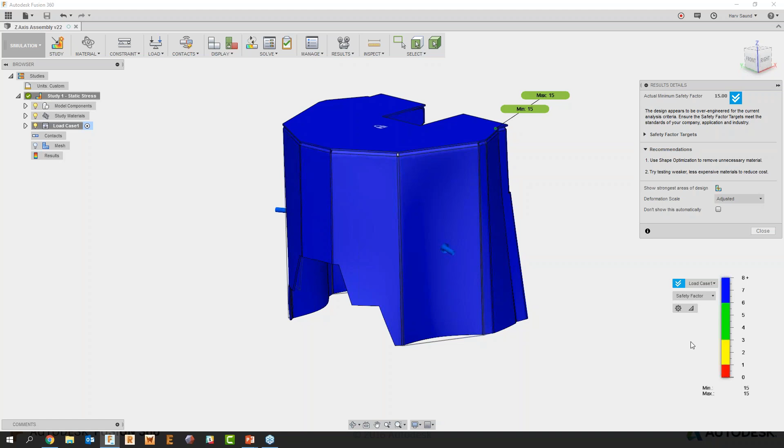If I start to look at stresses within that design, we can start to see where the maximum and minimum stresses are occurring in the design itself. We're actually quite good with this design, it's quite strong. We can start to look at displacements - it's only moving about 0.1 of a millimeter.

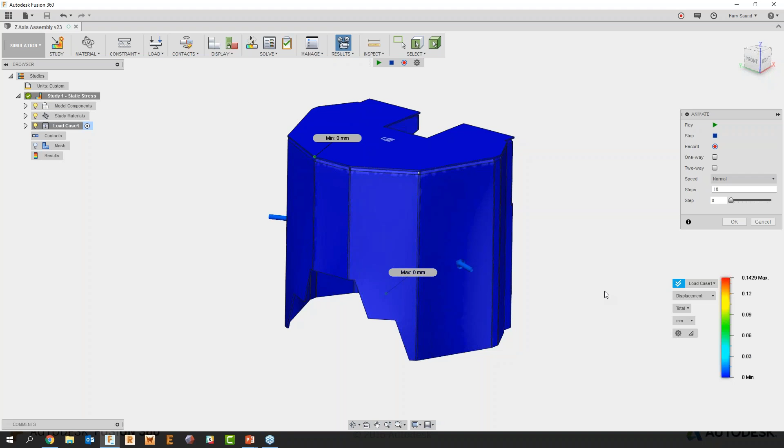At any point, you can animate these designs, so again, if I play that through, we can start to see that design animate as needed. And just like before, we have the ability to quickly and easily start to communicate this design with anyone, and we can view these results within a web browser as well. This makes it very simple and quick and easy to communicate everything with whoever you need to within the design itself, or whichever department you need to.

So very simply, we've been able to go ahead and test that design within Fusion - taking that design, designing the component as a sheet metal component, pulling that into communication where someone wanted to run a simulation. We've run that simulation and we can see that the design is actually fit for purpose, more than strong enough to actually handle the loading that we're putting onto it.

Now, one of the other key things for us with sheet metal components is manufacturing detail. So we need to go ahead and look at how we can take that flat pattern we created earlier, pop it into a drawing, and start to create bend tables and bits and pieces such as dimensions and bend annotations from this.

So let's jump back into Fusion and take a look. What we'll do is jump back into either the model or sheet metal space, it makes no odds at this stage, and start to create a drawing from this design. We can choose either the full assembly to create, so we want to go ahead and create a GA over the whole thing.

Or we can specify the components that we want to use. So I'm going to just pick this sheet metal cover subassembly, and we can either specify the subassembly or a specific component within that. If I just specify our upper cover just here, we have the option, because we have a flat pattern available to us, to either create the drawing for the folded model or create the drawing for the flat pattern. Now, when we're in the drawing environment, we can do both.

Once we go ahead and create the flat pattern drawing, we can specify any drawing templates we want to use, or create a new one. If it's a template we've got existing, we can use that. We can specify the standard we're working in and the overall sheet size. Once we click OK, we're into our drawing environment within Fusion itself.

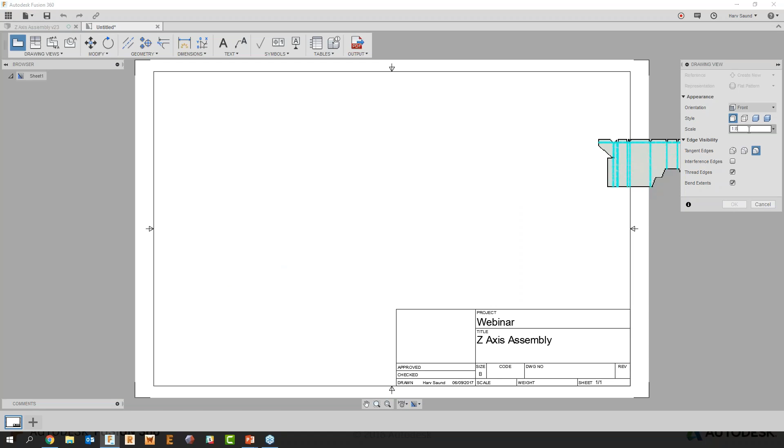And from here, we can quickly start to create the design itself. So again, I'm creating the flat pattern view. I actually want to make this slightly larger, so let's make this maybe 1:4, make it a little bit bigger. There we go, we'll drop that in place.

Again, we have the option to create this shaded. We can specify any edges and tangent edges that we need to, and if we click OK, that's going to go ahead and drop our flat pattern in.

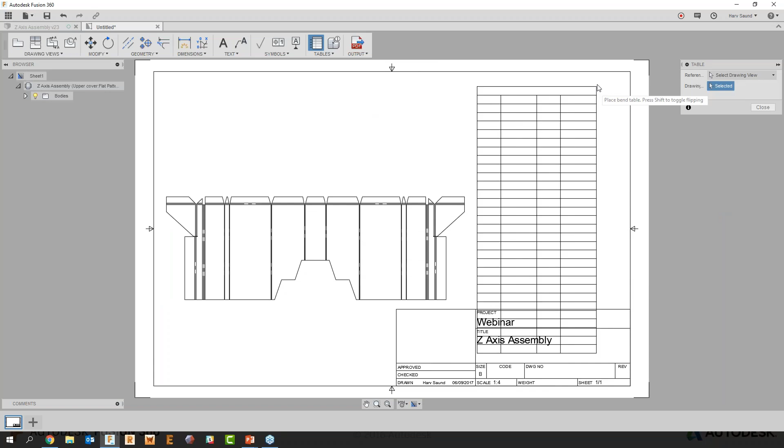Now, our tables tool, especially seeing as it's a sheet metal component, will default to a bend table. So if I specify that bend table in place, all of our bend tables are automatically generated, and all the number sequences are generated as well. And that bend table goes over into my title block. I want to change that, so I'll just grab this arrow down at the bottom, we'll drag this up, and specify that the break for that bend table is there.

Now, as we can see with this, there's a few numbers that overlap, that's not great. So what we can go ahead and do is just grab that number and drag it, and that's going to quickly and easily move that around. Once we move that around, it also automatically puts a leader in for us, so we're not having to do that manually. We can quickly and easily grab any of those bend notes on the actual flat view and put any of that detail in.

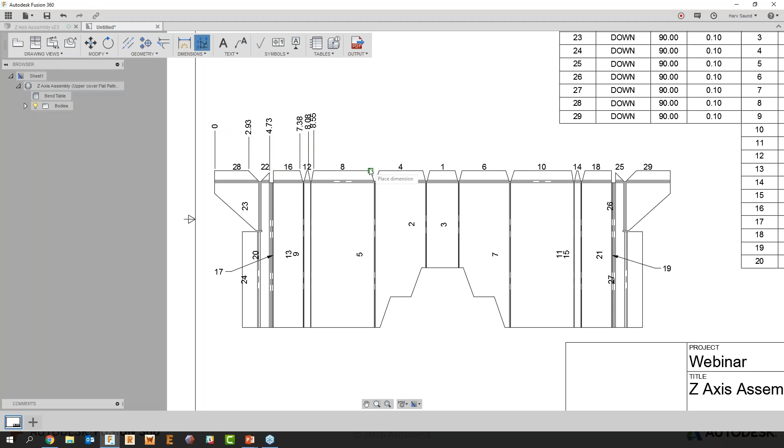And again, from here we have complete control with dimensions. We can go ahead and create some ordinate dimensions if we wanted to, or we can create some chain dimensions or baselines as we need to. So if I was to create an ordinate, we can quickly and easily start to create the ordinate dimensions we need in place to then specify where each of these edges or bend edges are going to occur within our design.

So it makes it very simple and easy to create a very detailed bend drawing directly from Fusion itself, especially having all the bend tables and bits and pieces in place. And again, for our output, we have the option to go ahead and do DWGs, PDFs, or if you wanted to just output the bend table, we can do that as a .csv as well. So very simply within Fusion, we've been able to take that design from just a standard model development into a flat pattern drawing, where we can quickly specify all the dimensional information, the bend table information, and simply have the manufacturing detail needed to pass on to the shop floor to manufacture that design itself.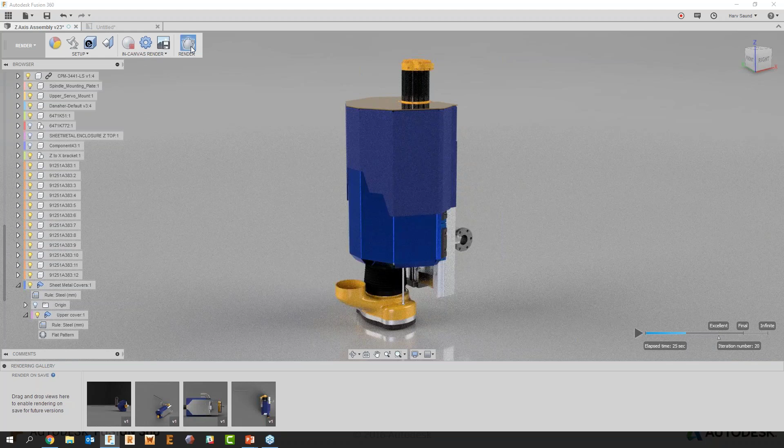And if you wanted to capture just that image, we have the option just there, but we can also quickly and easily pass this off to cloud. Rendering generally takes a lot of resource, so we can chuck all of the resources up to cloud, let the cloud render it, and then this will return us a result that we can go ahead and use.

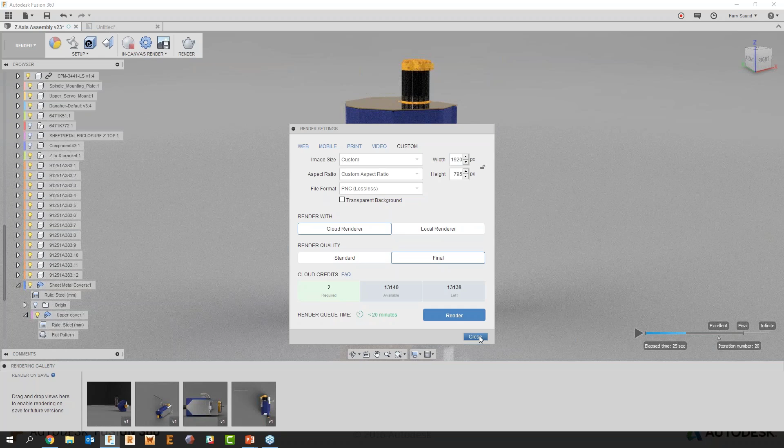But if you do have the resource on your machine, you do have the option to local render as well. So it gives you a very quick and easy way of choosing what you do at that stage, without needing the specific hardware that you need to render on cloud or render locally.

So very simply, we can create those visuals for customers as well, making it a simple, easy process to jump in from a sheet metal component to create the part, look at creating all the manufacturing data, looking at the simulation, looking at communicating it, but also giving that customer a nice visual at the end of it.

And then finally finishing off. Now we've done all the arty stuff - actually creating the part, creating all the manufacturing information for that part, looking at how that part's going to join to other components, communicating that design, running a quick simulation or a render. But what we actually want to do is create it.

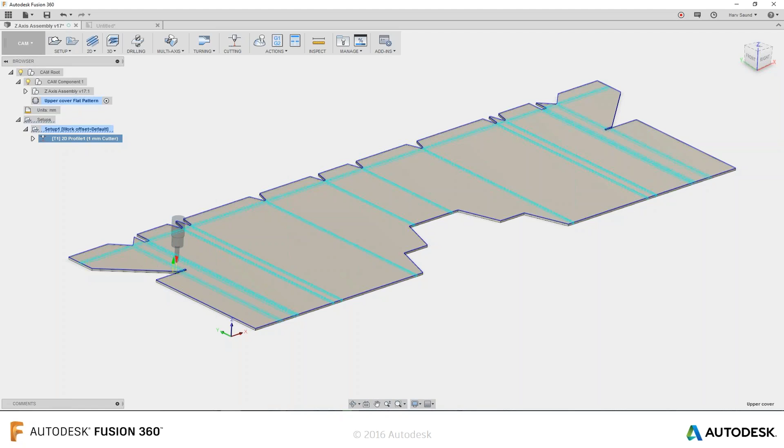So built within Fusion is integrated CAM tools. We can take the flat pattern that we've generated and create a laser cut or a water jet cut path that we can work with. So let's jump back into Fusion and take a look at how we do that. I'm just going to jump back into the modeling environment, and you can see we've pushed those colors back. Let's come back in for our workspace switch just here and go into that CAM environment.

Now our CAM environment allows us to go ahead and pick up on flat patterns. So it gives us the ability to choose the flat pattern that we want to cut. For this example, I'm just going to use the upper cover flat pattern. If I activate that, this is going to activate that flat pattern within the CAM workspace. From here, I can start to specify the setup for that design, and we can see that all the bend lines and bits and pieces are taken into place.

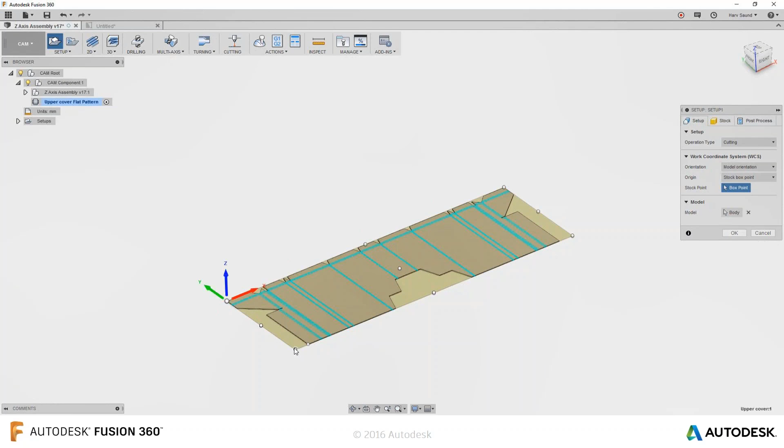We can increase the size of that setup. So if you're going to be doing this as a nest, we can maybe look at creating a whole multiple of these and start to look at nesting them manually. Specifying the origin, all we then need to do is specify the cutting parameters. Under our cutting tools, we can specify the kerf width that we're going to be using. I'm using a water jet just here.

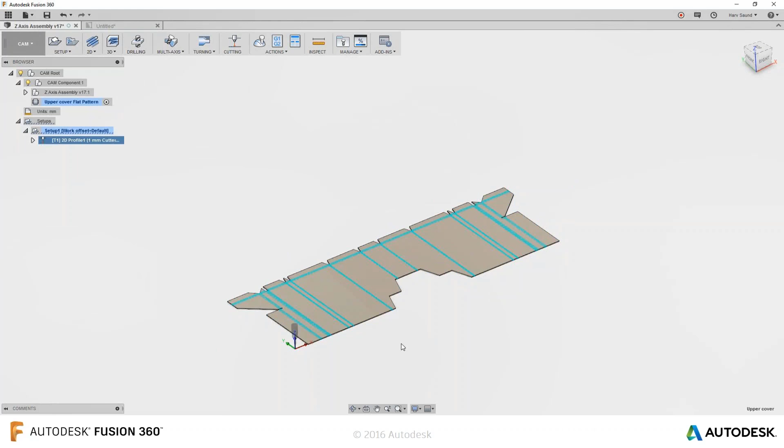Once a kerf width is set, which is 1 millimeter for my design just here, all I need to do is pick up on the contour. That's the outside edge of the design. We can specify any internal details as well at the same time, and Fusion will then generate all of the 2D toolpaths that we need. If I just wind the speed up, play through, and rotate around slightly, as you can see, it's going to cut all of that information for us.

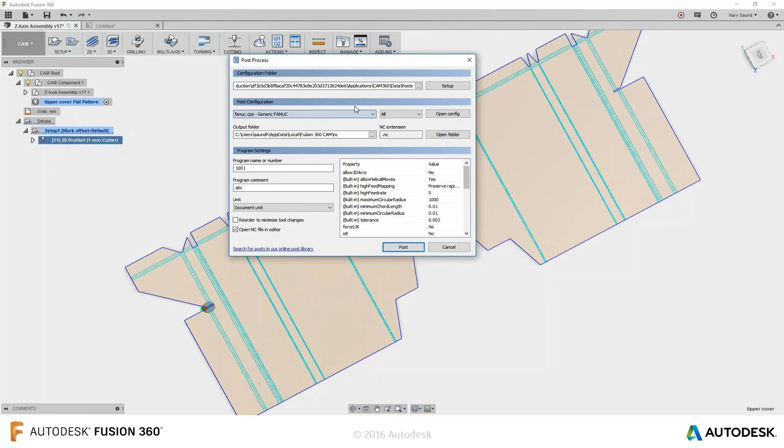So again, at this stage, we're not resigning ourselves to pushing this out to someone else to do. We can generate all that G-code and that toolpath directly within Fusion itself. We have some standard posts that ship within Fusion, so you can quickly and easily pick up on the post if it exists within Fusion, and then post out. So that's all the G-code taken into account. Or we can find that at cam.autodesk.com. There's a few posts on there that you can use as well. So really quickly and easily, we can take that design from art to part.

So what we've looked at is that new functionality, which is sheet metal within Fusion 360: the ability to quickly and easily create a sheet metal component off of sketches, to generate flanges and specify the end conditions for those flanges, to quickly and easily adjust those, and to use standard methods such as sketches to cut certain areas of those flanges. We can quickly look at how we change those rules, how we create the flat patterns, unfold a single flange or a single bend, and start to create options there.

We can then move this into the communication environment. From here, we can communicate that design with whoever we need, whether that's manufacturing or an outside subcontractor. Move this into simulation, where we can look at simulating that design and making it valid prior to actually manufacturing anything. Moving this into our drawing environment, creating a flat pattern drawing with our bend tables, rendering this for visuals for a client, and then finally actually generating the part from either a laser, a CNC or a water jet cut method.

So you can quickly and easily take that design, like I mentioned right at the start, from art directly through to part. That's just a very quick intro into our sheet metal tool within Fusion 360. There are a whole host of other bits and pieces, and you can find those on either our YouTube channel or within the help menus, with tutorials.

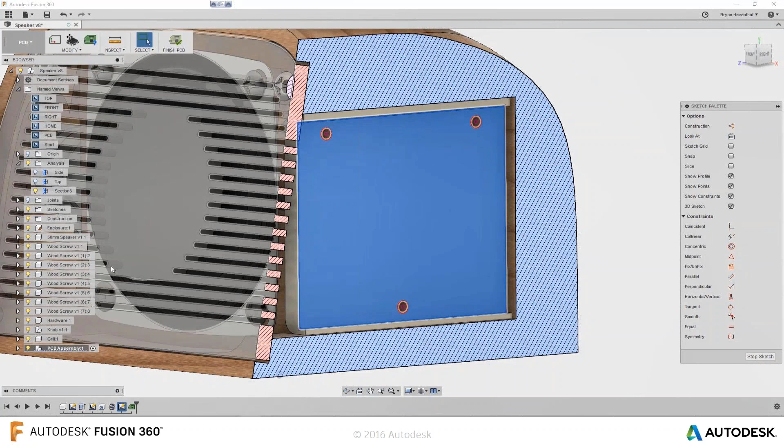It's just a very quick ECAD to MCAD environment that we now have within Fusion 360. Now, as we already know, and I mentioned it before, products are changing. So we're starting to put PCBs and bits and pieces into parts. So directly within Fusion now, we can actually go ahead and specify a PCB layout by specifying a sketch. And using our Eagle tool, we can quickly and easily start to specify that board layout, push it from Fusion to Eagle, and then from here, we can then start to specify that overall board layout.

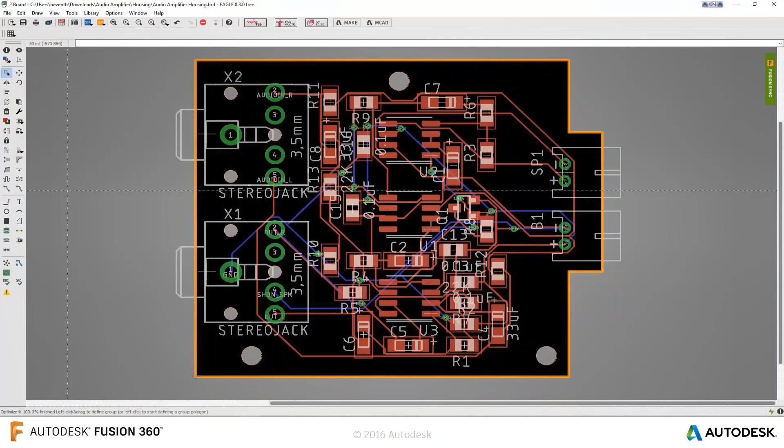Using the 3D libraries, we can then start to build that PCB in 3D, which gives us the ability to quickly and easily start to check for interferences with designs. And then if we need to make any adjustments to the PCB, we can go ahead and make those adjustments live within 3D. We can find those interferences and then pull that design directly from Fusion into Eagle to reset that board, giving us the ability to quickly and easily have a more integrated environment between ECAD and MCAD, having the ability to then run thermal simulations or even CAM on the PCB. So really quickly and easily, we can then go ahead and have all of that as a complete integrated ECAD to MCAD environment directly within Fusion itself.

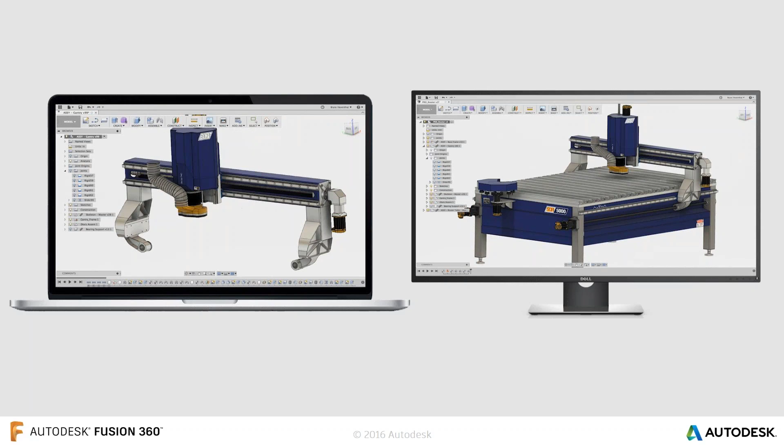And the other preview that was released within that August 8th release is the browser version of Fusion. So from here, we've been pushing the boundaries for a few years now with hardware, so not having to just run on a Windows machine. We can also run Fusion on a Mac, but we now have the ability to run within the browser. Now it's limited functionality, it sketches, extrudes, cuts, but it gives you the ability, if you're with a client or you want to make some very small changes to a design, to quickly and easily do that directly within a browser. You can launch any of your designs from A360 or Fusion Team directly within the browser itself.

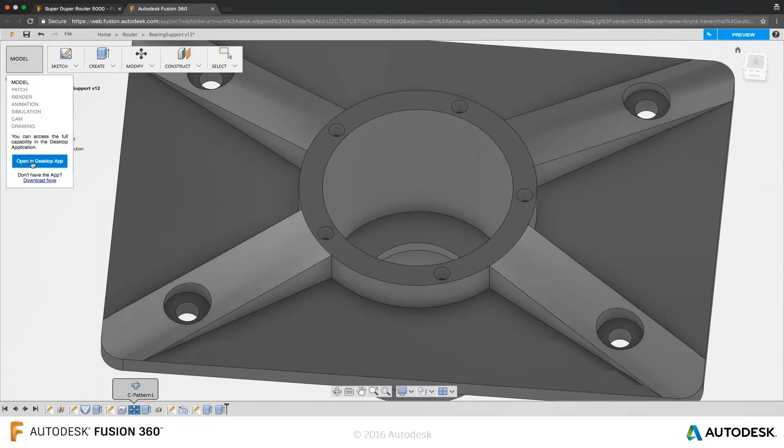It's just a click on a point within the environment itself, which I'll show you, and you can start to generate a design or start to make some changes to a design or a very quick concept directly within the browser. Now, when you're ready to, you can then start to look at adjusting features, but also pushing this design back into your desktop. So if you're out and you only have something like a Chromebook or something, you can go ahead and make those modifications within the browser. But then you can also, once you're back at your desk, push that design from browser directly into a desktop application as well, or desktop Fusion. So it gives you the ability and the flexibility to use Fusion wherever you are. Again, coming back to that point initially where I said accessibility anywhere.

As you can see at the top, pick a design, edit in browser or desktop within the actual web interface. So a very quick and easy way of actually going ahead and looking at a different way of designing within Fusion. So again, those are the couple of previews that were released within the August 8th release. So again, I implore you guys to go ahead and start to look at those and use those. You can activate them from the Preferences tab in the top right hand corner of Fusion under your name or under your user. Hit Preferences and then you'll see at the end of it previews, and then you'll see the previews tab just there. So it gives you the ability to go ahead and start to look at those as well. So again, those are from customer enhancement requests.

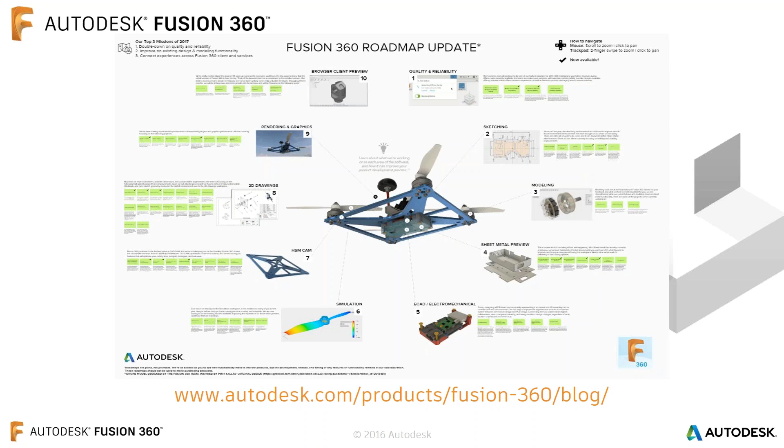So again, pop up to Idea Station on Fusion itself, and we can quickly and easily start to look at implementing the ones that we need. So again, we implore you guys to go ahead and give us an idea on what you want from Fusion itself. And with that, we actually publish our roadmap live. So you guys can see what we're working on in development for this year. So you can start to see what we're going to go ahead and focus our efforts on. So there's a lot on 2D drawings. There's some stuff on ECAD, MCAD, which we've released. Stuff on sheet metal and simulation. And if there are ideas that you guys have, you can go to fusion360.com and under community, you'll see Idea Station. Raise an idea. Every idea is taken seriously, so you guys can go ahead and start to see those.